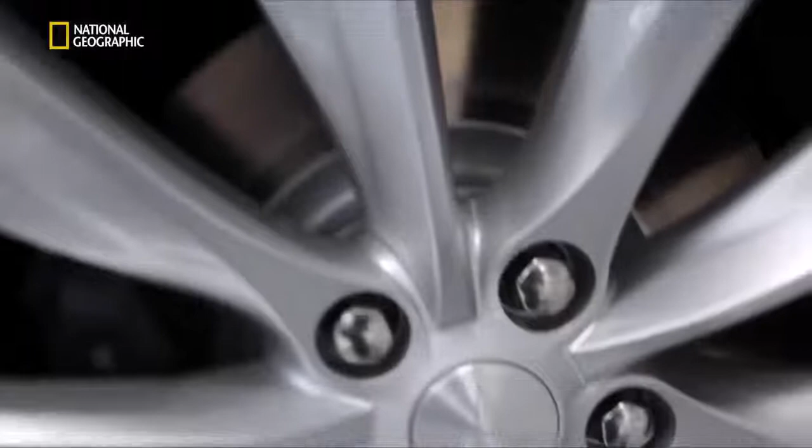Aluminium bodywork, 19-inch alloys, and a $50,000 price tag. At first glance, this car is the latest in a long line of high-end sedans. But that is where the similarities end. The Model S is a totally different type of car. Tesla believe it can lead a revolution and change the face of motoring forever.

It's the first ever mass-made premium sedan powered purely by electricity. Designed to have speed and range, and not a drop of gas. Our goal is to create an electric car that is the best car in the world and show that that's what an electric car can be. Tesla's goal is to kill off the combustion engine and prove the electric car has finally come of age. Driving a gasoline car is going to feel like yesterday. Driving this car is driving the future.

This is Elon Musk, Tesla's co-founder and CEO. Elon is an inventor and a maverick entrepreneur, one of America's youngest billionaires. I like exploring, I like technology, I like creating things that have never been seen before or even imagined before. He is a genuine Silicon Valley success story. In the mid-1990s, Elon set up a small internet company. By 2002, he'd sold PayPal for $1.5 billion. Next, he founded private rocket company SpaceX. It's all part of Elon's life mission.

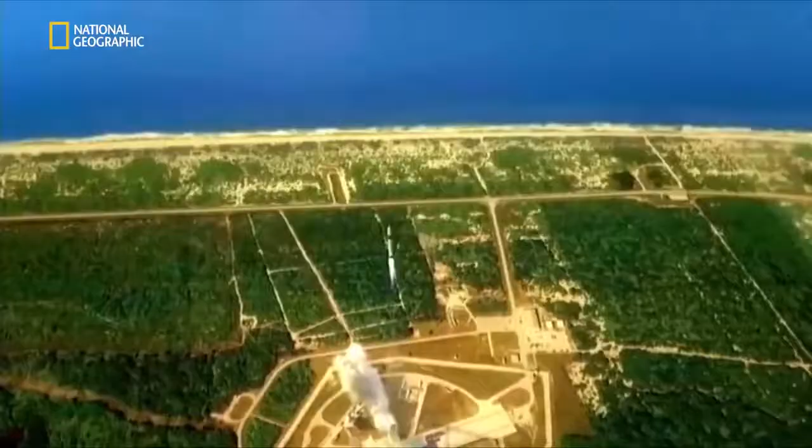When I was in college, I tried to think about, well, what are the areas that would most affect the future of humanity? So the three things were the internet, making life multiplanetary, and the third being sustainable energy. So that's what really ties together my companies, is that sort of thought from 20 years ago. Tesla Motors is Elon's sustainable energy brainchild. Named after electric power pioneer Nikola Tesla, it's a car company that only makes totally electric vehicles. No hybrid and no alternative fuels. Absolutely no tailpipe. The company estimates their electric cars cause 50% less CO2, even if much of the electricity comes from a coal-powered plant.

It's technology Elon and co-founder J.B. Straubel believe we need. We're solving problems for our children, our grandchildren. Oil is a finite resource, and eventually we have to find alternatives. When you take that oil out of the ground and you burn it, it's extremely dangerous. We should not play Russian roulette with the atmosphere. We only got one. Tesla's founders have a vision of a world without gasoline cars. They are convinced electric is not only cleaner, but better. Now, they want to prove it to the world.

They believe their cars can trigger a transport revolution and bring electric motoring to the masses. What we're doing here at Tesla can have an amazing impact and revolutionize the auto industry and make every car on the road electric. That's our end goal. The Model S is to lead their revolution. It's to be an electric car unlike any other. A family sedan that can go from 0 to 60 in under 6 seconds, and further on a single charge than any other electric production car. Designed to match the top gasoline competitors. With the Model S, we're taking things to the next level. It's a full-size sedan, so it's competing in the premium segment, along with, say, a BMW or an Aston Martin.

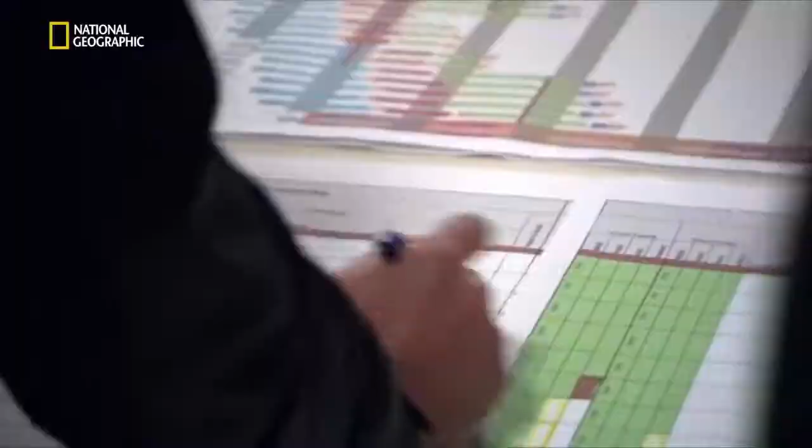But the car is only the beginning. Such a revolutionary vehicle demands a revolutionary factory. Tesla needs to create an unprecedented state-of-the-art facility from scratch. Elon brings in Gilbert Passin as head of manufacturing. Gilbert is an expert from one of Toyota's award-winning plants in Canada. His description of my job to me was very simple. You've got to create the best factory in the world with the best people in the world and make the best premium car sedan. And I said, okay, so where's the factory? Well, you have to find one. Where's the team? Well, you have to make one.

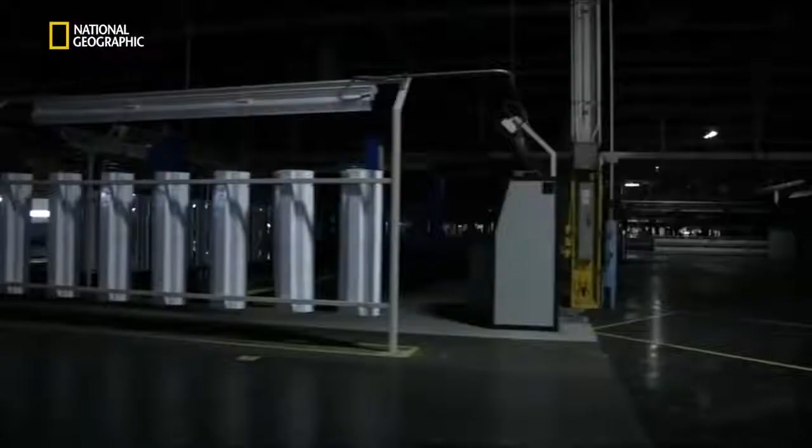The company purchased a former GM and Toyota site in Fremont, California, on the edge of Silicon Valley. The abandoned facility is a traditional car factory. Dark, little natural light, bare concrete floors. When Tesla Motors move in, it's the birth of a megafactory like no other. It's a totally fresh approach to car manufacture.

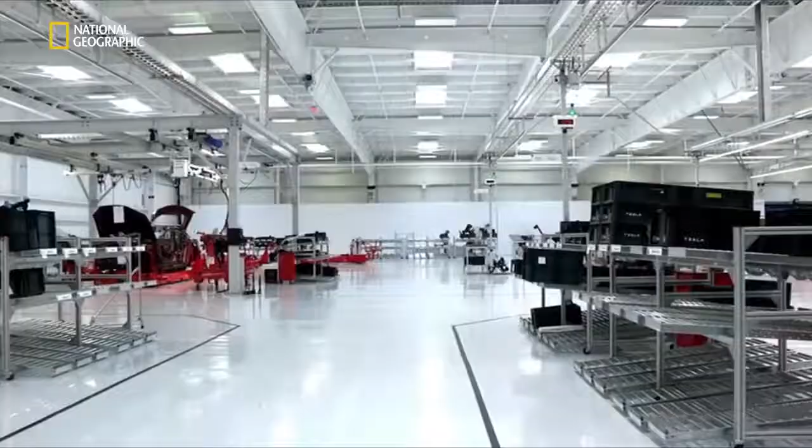The walls and floors are painted white. The machinery a striking red. Skylights and windows flood the factory with sunlight. If you make the factory pristine and clean, that sets the tone for the vehicle. We want that same sense of quality and precision in the car itself.

As part of the whole company ethos, bikes are provided so the workers can get around the factory. I think it's important to have an environment where people look forward to coming to work. So it's worth putting some effort into making the factory beautiful.

In true Silicon Valley style, they fill the space with the most advanced technology, creating an automated production line capable of building tens of thousands of cars. Super efficient multitasking robots, self-guided smart carts, and computerized production schedulers.

The factory is designed to be up there with the very best in the world. We love engineering. We love beautiful machines. We love new technology. We love to innovate with high technology. And also in manufacturing, we love to do that.

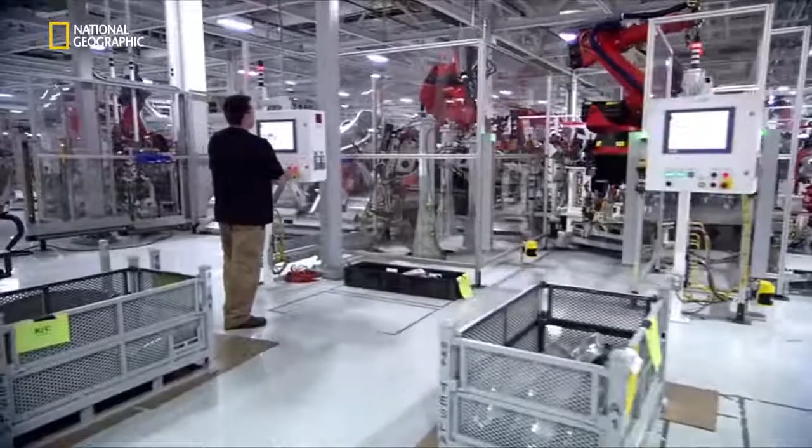Without training, these sophisticated robots are useless. They all need to be taught before they can run tasks automatically. Every robot is programmed by hand. The Tesla team has meticulously trained 130 sophisticated robots over a year and a half.

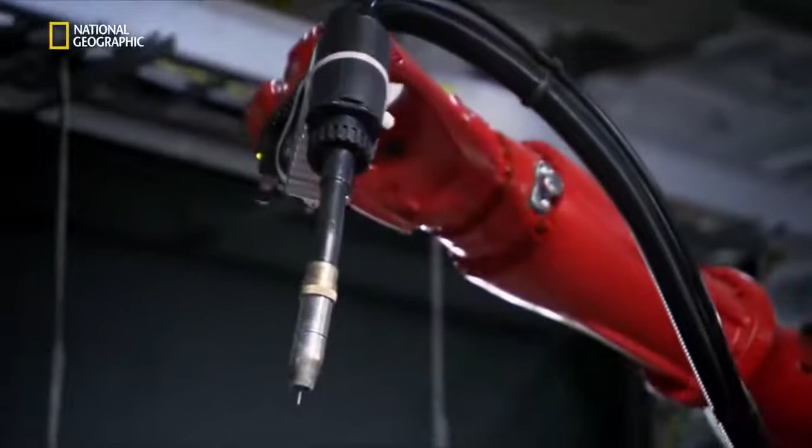One of the last robots still to be programmed is a multi-point welding robot. It will be used to join the car's underbody. These are pretty busy robots, so we gotta make sure that our takt time is good. A robot's work is only as good as the man who trains it. Brad Johnson is a welder with over 25 years' experience at the highest level.

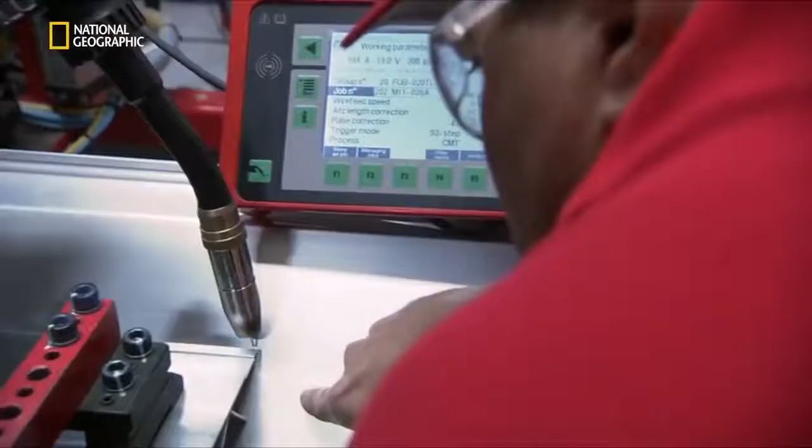Getting this done today, we'll have the teachings all nice and smooth, and then we can start running 100% in full automatic. That sounds good. The space in which the robot operates is treated as a three-dimensional grid. The head can be manually guided to any point using a teach pendant.

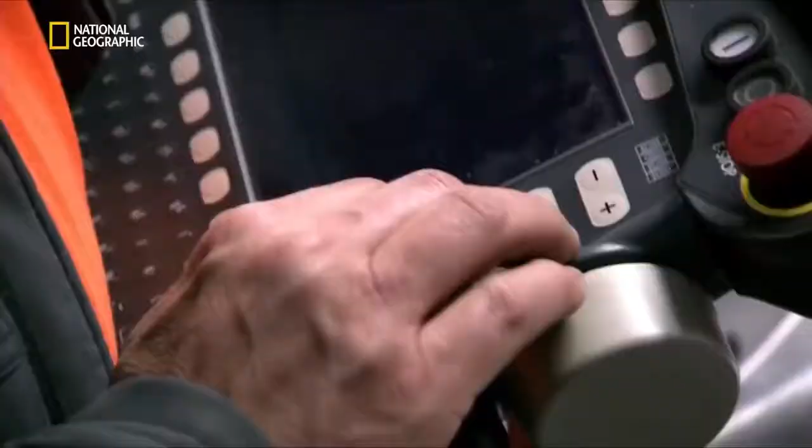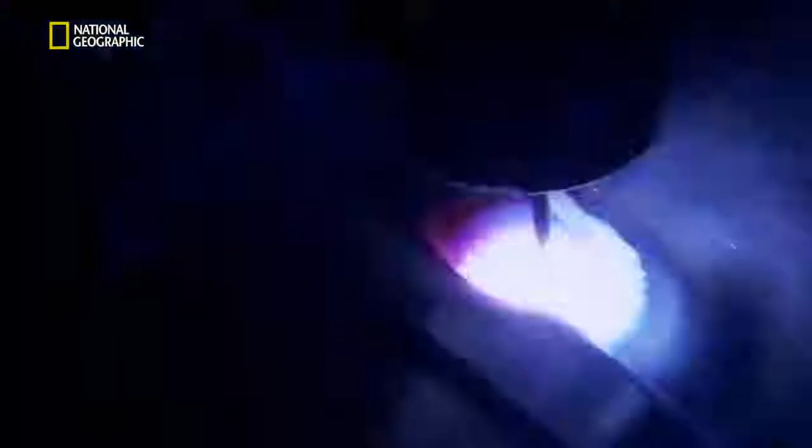There's our start point and our weld position. Brad guides the robot millimeter by millimeter and uploads the coordinates. The robot works out the most efficient route and runs the program.

Looks like the teaching is right on mark, and we have a really good quality weld right here. So we should be able to run full auto with this weld. When full production begins, Brad's handiwork will be exactly replicated by the robot 100 times a day.

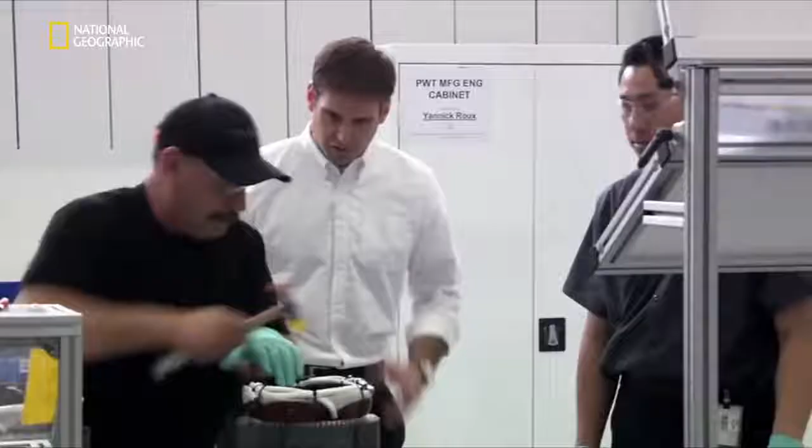Since their inception in 2003, Tesla Motors have been pursuing their electric car revolution with a step-by-step strategy. In an unconventional business move, Elon decreed that Tesla must invest in their reputation first and worry about profit later. Stage 1. Make a small number of high-value cars that prove electric power can be desirable. The Tesla master plan is very simple. We start off creating an expensive, low-volume car to help break the mold in electric vehicles.

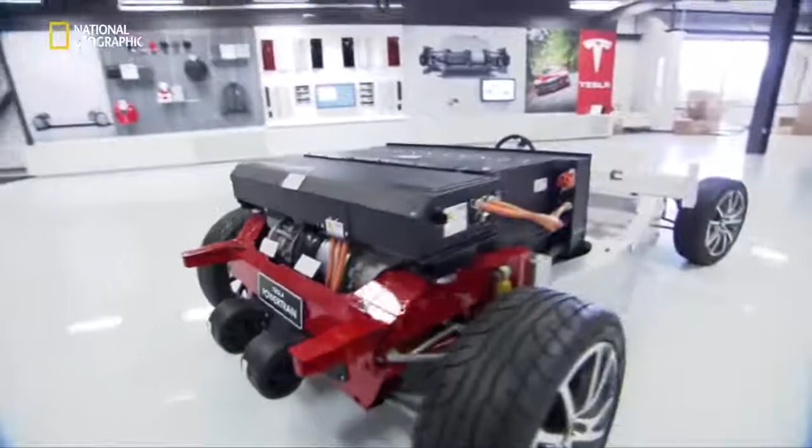Plan in place, they set to work on their first car, basing it around the British-built Lotus Elise. 5 years later, they released the Tesla Roadster. Quicker off the blocks than an Aston Martin Vantage, the electric sports car astonishes the motoring world. Step 1 complete in the Tesla strategy.

What we showed was that an electric car could be sexy, it could be fast, and it could be long range. And that if you produce such a car, that people would buy it. But as a $100,000 two-seat sports car, it's a luxury second vehicle to most of its owners.

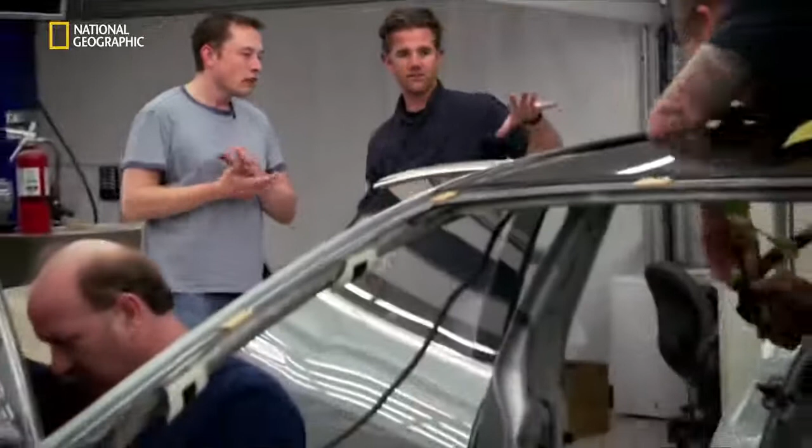Time for the pivotal Stage 2 in the master plan. A car that costs half as much and sells in much bigger numbers. A very important step in the Tesla strategy is really going to show that a mainstream electric car can be better than a gasoline car. The Model S is the second step in Elon Musk's vision of an electric revolution. A premium mass-market sedan designed and built from the ground up by Tesla.

At the studio in Los Angeles, they are working to craft that car. The Model S is really the foundation of Tesla. It's the first true product designed, engineered, built, manufactured by Tesla. And it's really the beginning of what our mission is about.

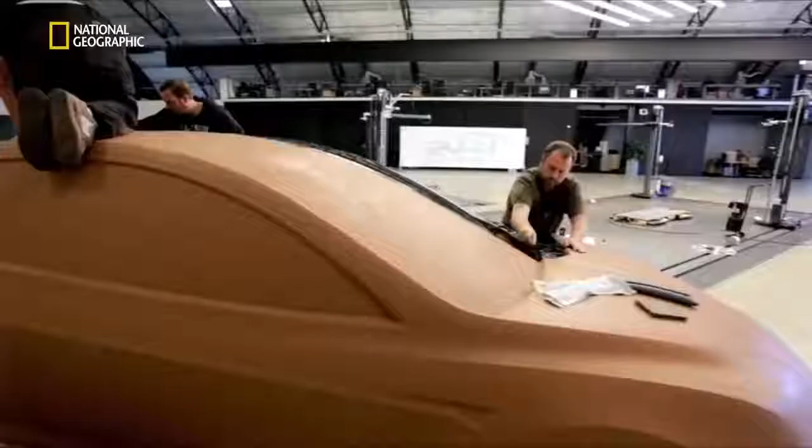Franz von Holzhausen is the chief designer. He believes Tesla's design needs to have some conventional appeal. It's really easy to have a clean slate and go pretty crazy with that. We had to start with something that people could relate to. If they even knew or cared that it was an electric vehicle, they were attracted to it.

We've stretched the sedan and made it a little bit more modern, but it's still a sedan. It still has this somewhat traditional cue, and so it's easy to love because of that association.

Although uniform in appearance, the Model S is a unique car. It was conceived as electric. Even the shape is designed to maximize the battery's range. The body and the waist here is all slim, so there's no excess fat or body mass on this car. And that's another one of those elements that just translates into great efficiency.

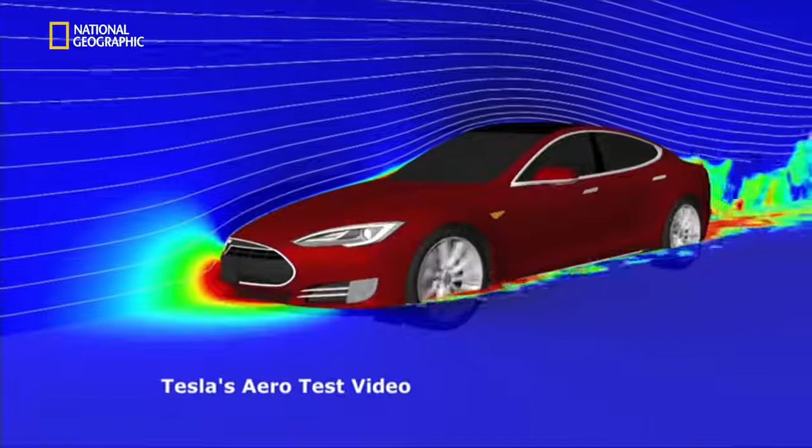This car is one of the most aerodynamic sedans on the market. In an electric car, conserving the battery power is so important, the designers put huge efforts into reducing the drag. Even the door handles are aerodynamic, receding flush into the body.

But it's the interior that is most heavily influenced by the electric powertrain. The powertrain is incredibly small. You get the same performance out of a motor that's the size of a watermelon that fits between the rear wheels, and everything else above that is what I call the opportunity space.

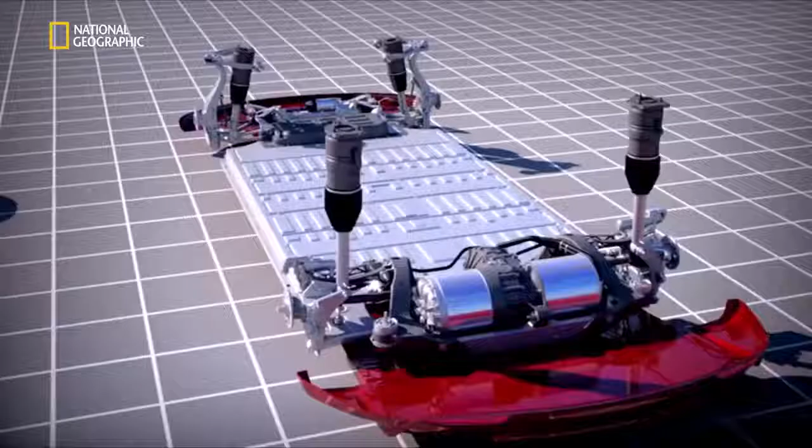The design team started with the motor and flat battery pack and worked upwards. With the motor next to the wheels, there's no need for a drive shaft, so there is no rise under the rear middle seat. There is no fuel tank or transmission. The Model S has free space from the floor upwards.

What you'll see is a vast amount of space. In fact, it's actually so big that we decided that we could actually fit 7 people, and we do that by putting 2 rear-facing child seats in the back here. And you can see where they fit here, and their legs go right down in there.

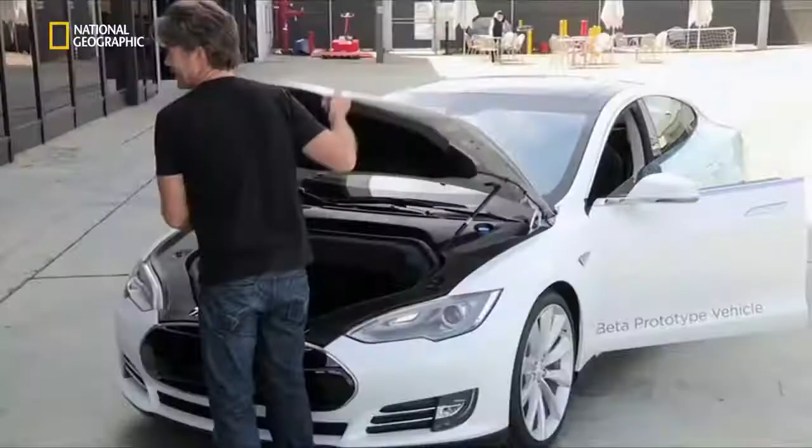So this is what we call the frunk, and it's really the trunk in the front of the car. And arguably, you can put a whole bunch of stuff in here, even when the back of the car is totally loaded up with people and kids and stuff. And who doesn't need one of these?

Tesla promote these unique features at every opportunity. As a new marque, they're trying to make an impact in a marketplace crowded with established big hitters. Just looking at the United States, of the 3 other car companies, the youngest is 90 years old. So clearly this is not an industry that has been supportive of newcomers.

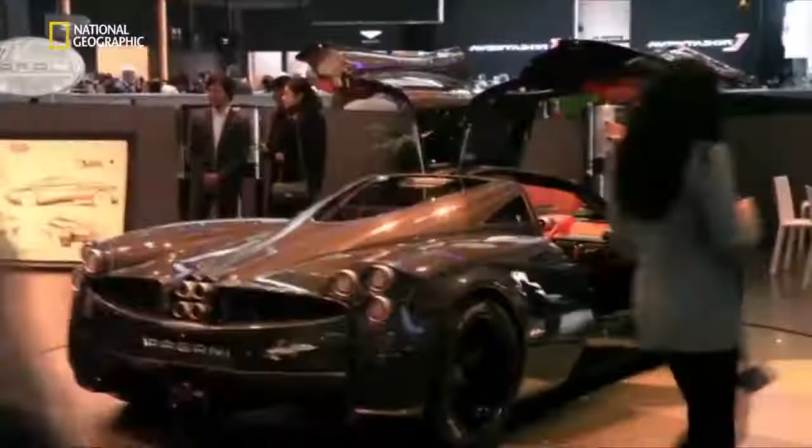The Geneva Motor Show 2012. Another leg in the company's relentless promotional campaign. We're done selling Roadsters in North America, so this is our product. It's our product, Tesla product, and therefore we need to get it out to start selling.

Industry experts are judging Tesla on the Model S. It's seen as make or break. Maybe Tesla has a bright future. I think the Model S is very decisive to see if there will be a great future or if there won't be a future at all.

The company have taken the risk of collecting prepaid orders on the car. They've amassed nearly 10,000 advance sales. The financial boost also creates real pressure. I get harassed quite a bit actually by some people who have reservations, and it's a lot of expectations, very high expectations that we're going to have to meet and exceed, really.

Some prepaid customers have been waiting up to 3 years for their car. In return, they've been promised a delivery deadline. I do feel an incredibly strong obligation to those that have placed their faith in Tesla and put down deposits. I'll do anything to make sure that their faith is not misplaced.

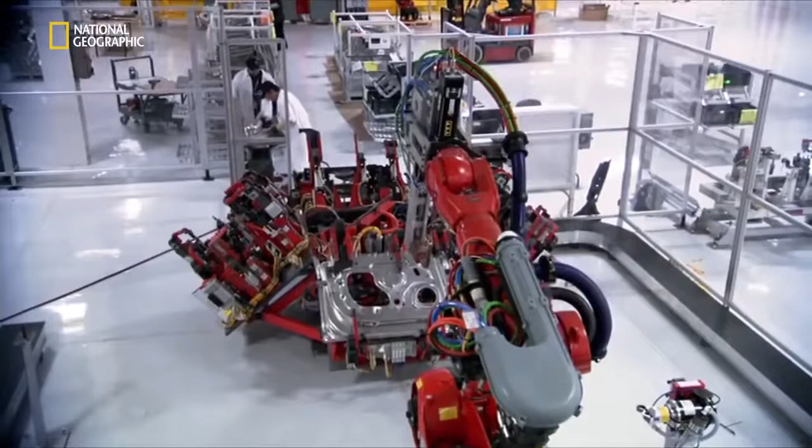The delivery deadline for the first cars is now only 2 months away. But the brand new factory hasn't built a production car yet. If the customers are to get their Model S on time, the facility urgently needs to start manufacturing. The speed at which we have to work here is extremely important to the company's bottom line. This is a kind of timing that is really, really challenging on many, many different accounts.

Tesla need to build 20,000 cars a year. But before mass production can begin, Gilbert and his team must prove the factory is ready. The company is relying on them to get it right. We have to make sure that car after car, the quality is there, everything is perfect along the way. So we are really gearing up towards a production ramp-up.

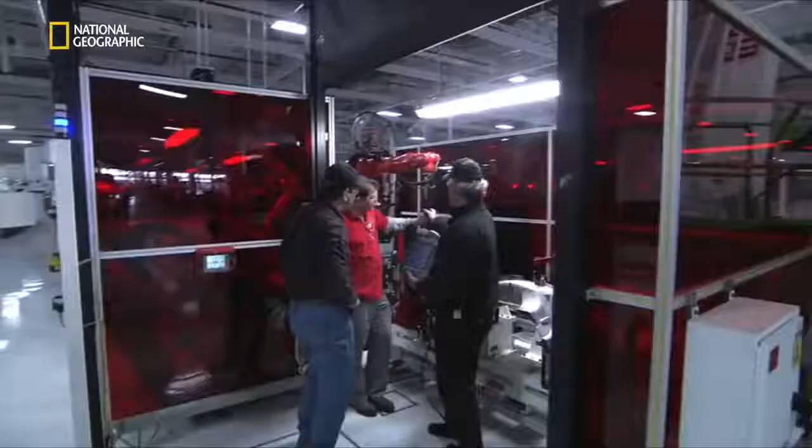Over the next few weeks, the factory will test manufacture a limited number of Model S. If the line doesn't perform with these cars, the company will be forced to miss their deadline. Tesla's electric revolution would be over before it started. A very, very important moment is the birth of Model S in our Tesla factory. And it's where the rubber is going to meet the road, so to speak.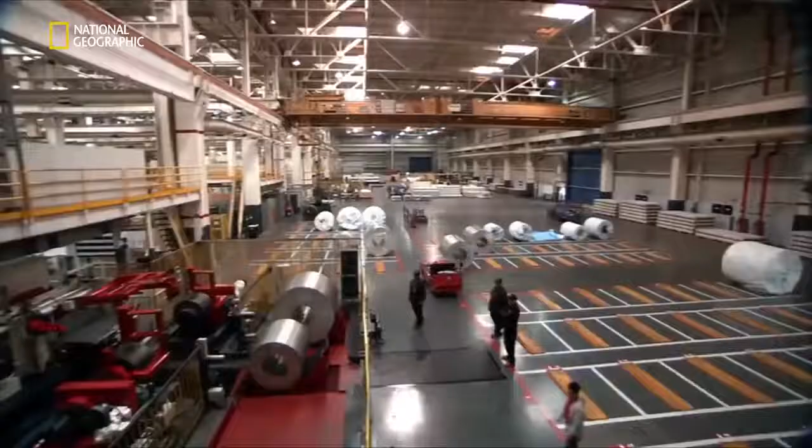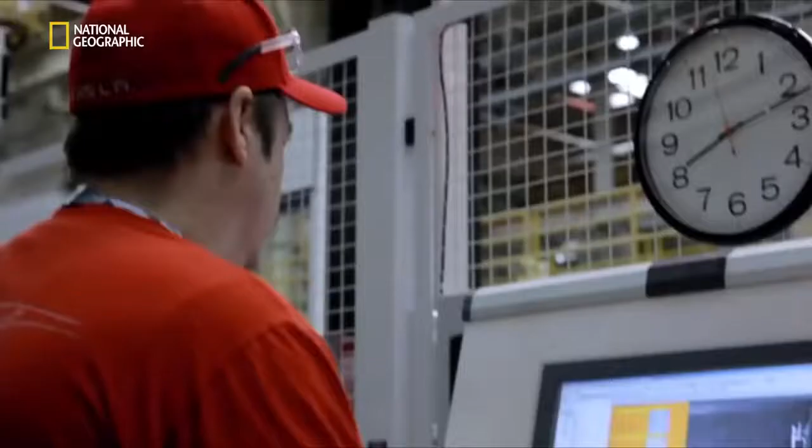The process begins in stamping. To increase the battery's range, the company have decided to build 97% of the Model S with lightweight aluminium. It's an extremely rare feature in a mass production car due to the cost. Every Model S starts as one of these. The roll is loaded into the mechanical cutting machine.

Once cut, the panels are passed to the stamping press. We need to translate flat pieces of aluminum into 3D forms. And how to do this with aluminum stamping with the level of quality that we expect is really, really challenging.

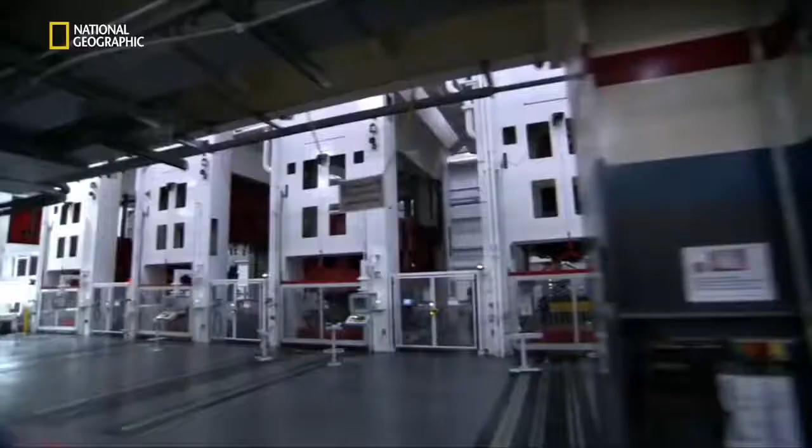To meet the challenge, they buy the largest available stamping press in North America. It's one of the first pieces of equipment they install. Over 3 stories high, it has to be transported from Detroit on 70 trucks and then entirely rebuilt.

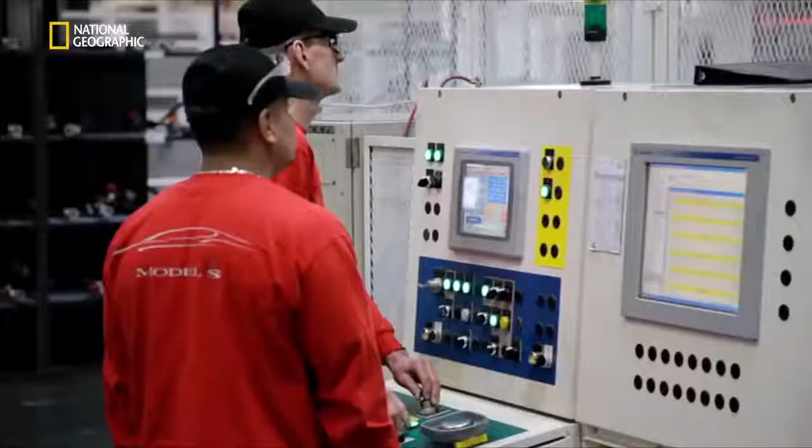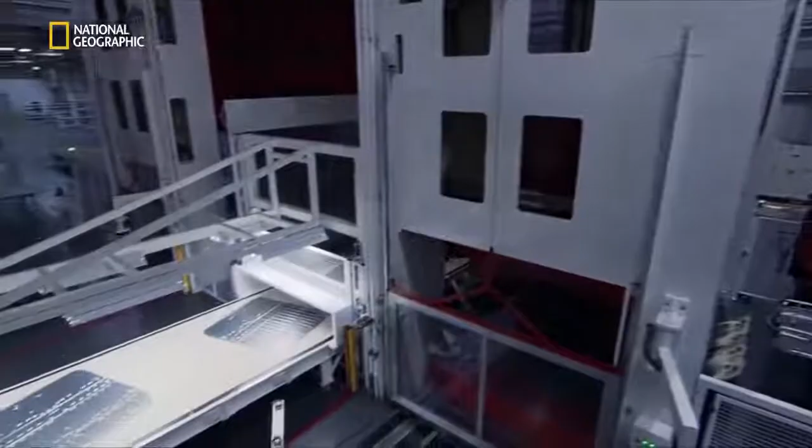The immense pressure from the stamp allows them to press the complex body shapes needed for the Model S. It can be mounted with different heads, known as dies, that mold the panels into a wide variety of shapes. Robotic arms feed the 4 stamps. Each stage forces a more detailed 3D shape, producing stacks of floor plates.

These lightweight aluminium parts improve the Model S's power-to-weight ratio, which helps increase the performance and range. The 2 things that obsess co-founder and technical chief, J.B. Straubel. Any ideas on how we could make it better? Performance and range were the 2 big issues that needed to be improved, and that's where we've put most of our focus on the technology and powertrain.

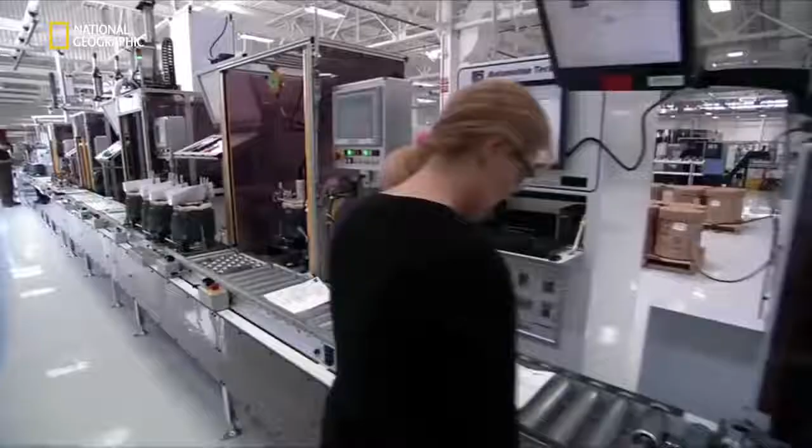Powertrain manufacture, 2nd floor. This is where they build the heart of the Model S, the motors and battery packs. Tesla know the electric powertrain will define their cars, so they push to advance the technology themselves. This is an extremely exciting field where inventions continue to happen even faster than they did in the years previous.

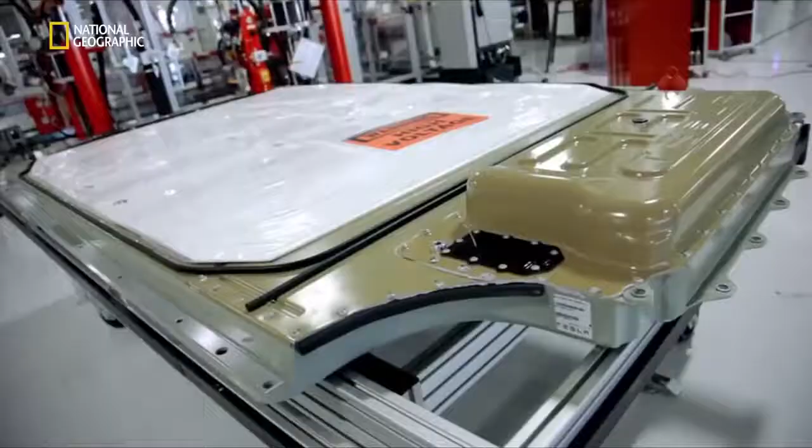Tesla's solution to improving battery life appears startlingly simple. They use thousands of small lithium-ion cells, similar to laptop batteries. Thanks to these regular batteries, the company say the Model S has achieved a top range of 480 kilometers. Once you have 250 to 300 miles of range, then you're in a different usage mode. You're in a range that is equivalent to most gasoline cars.

The car can be charged by 100 kilometers every hour from a regular power outlet. Ultimately, Tesla are hoping to install superchargers along major highways that can charge the car to capacity in 45 minutes. You can charge the car up every night, but you don't need to. You can actually charge it once a week.

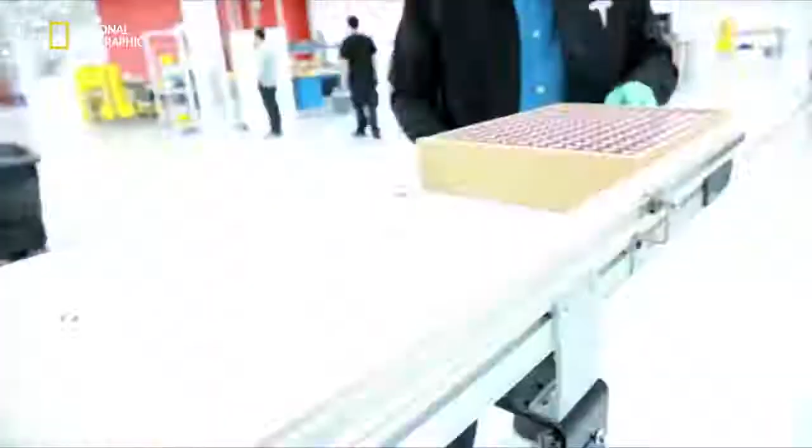The high-performance battery pack is formed with over 7,000 small cells. They're organized into a flat layer with specific groupings of positive and negative. The final layout is the key to the pack's power and range, and Tesla considers it absolutely top secret.

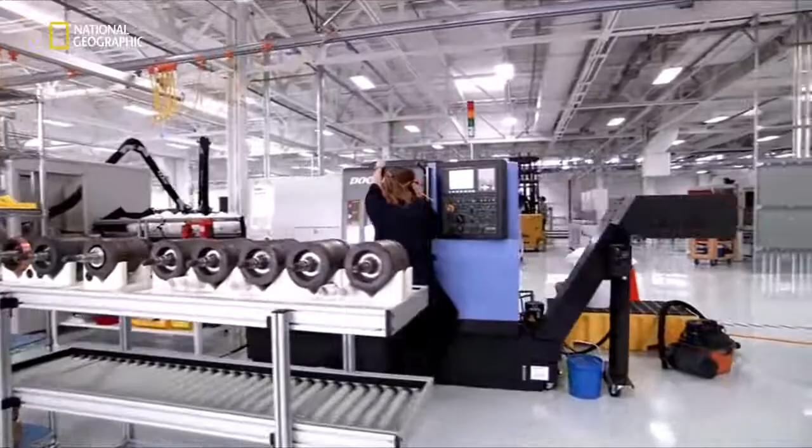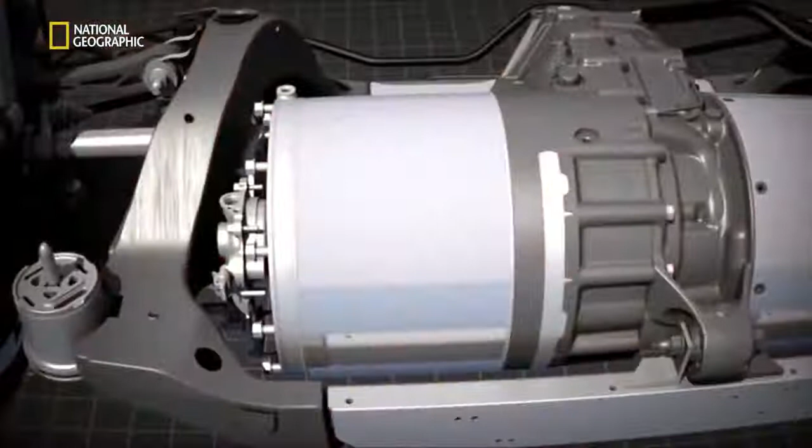The motor unit is also developed in-house. It's essentially an AC induction motor, a concept invented by 19th century scientist and Tesla Motors namesake, Nikola Tesla. He harnessed an electromagnetic field to turn a basic motor. Modern-day Tesla has developed their motor with a highly conductive copper cylinder. When the electromagnetic casing is fed with current, the copper cylinder inside starts to spin.

It's nearly 3 times more efficient than a combustion engine. In fact, there are only 3 moving parts. It connects directly to the rear wheels and doesn't need a transmission. These are the 3 moving parts in the whole Model S powertrain.

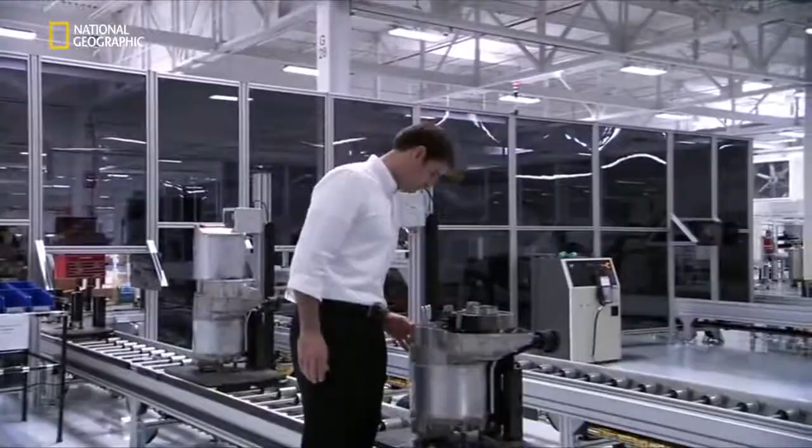One of the cool things also with this very simple gearbox is that when we want to go in reverse in the car and back up, all we have to do is spin the motor in the other direction, and the car backs up. We don't need a clutch, we don't need a separate gear for reverse. The entire drive unit is under 1 meter long, smaller than a golf bag. But it propels the Model S, a family-size sedan, into the class of performance cars.

In fact, this powertrain creates a totally different driving experience. Program Director Jerome Guillen works constantly to refine it. As with the light switch, electric power can be fully applied instantly. The first thing that's gonna surprise people is how much torque you get so quickly. That instant response, you cannot really mess with the throttle too much, because if you push on it, then the car will go.

Even from a stop, you have a very quick takeoff because basically the torque is instant. So if I stop here and then I start, you will see that we have an acceleration right from the beginning. Any speed, you have that same torque available. So it's very easy to pass a car or to get out of harm's way if needed. Unlike gasoline cars, which have to change gears, the Model S can accelerate to top speed totally uninterrupted.

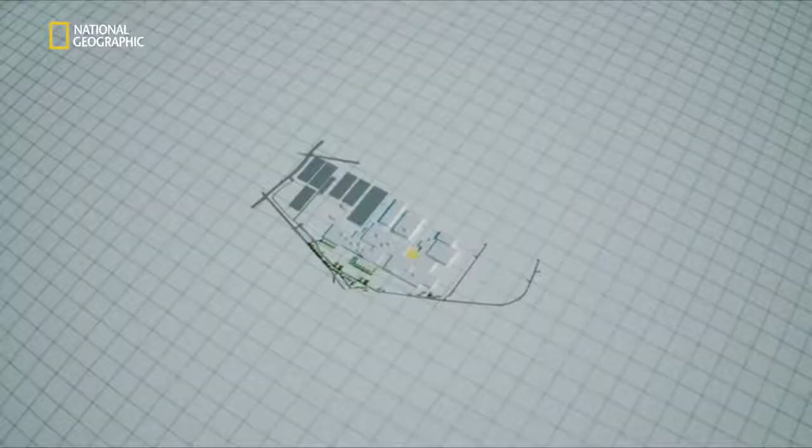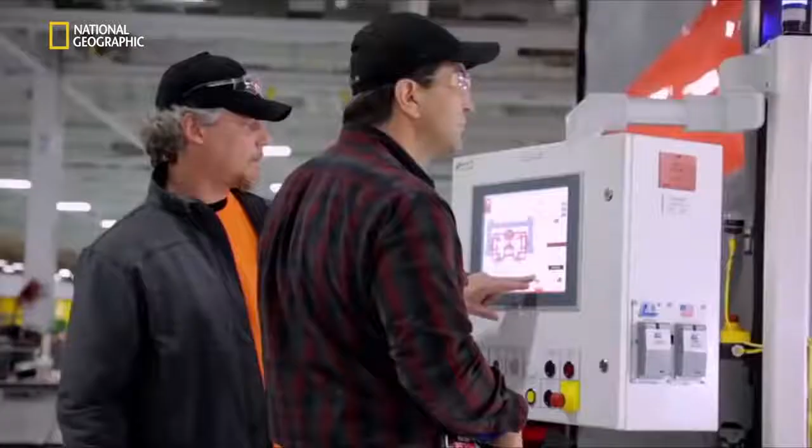In the factory, the delivery deadline is now fast approaching. The Model S test production cycle reaches the main assembly area. The car is based around an aluminum underbody. To make it, engineers weld struts and casts into a framework. Brad's newly trained welding robot is about to be tested in full automation. They have trained the robots with prototype parts. Now, with final components coming through successfully from stamping, it's automated production for real.

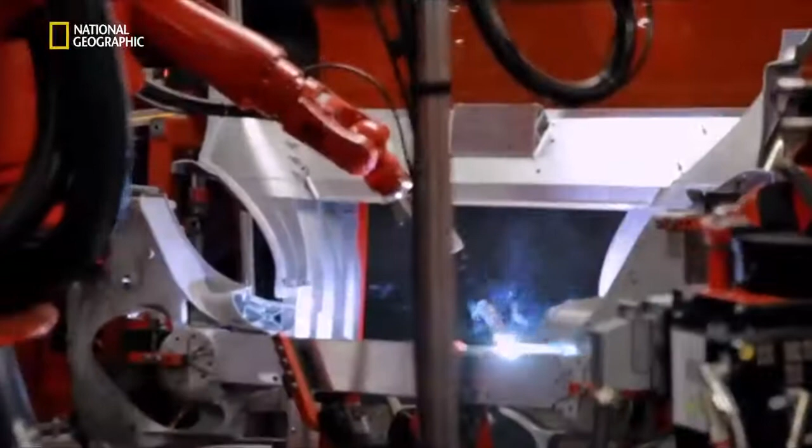Under observation, it's a tense time for the team. The robots work in a tightly coordinated chain. The second phase hits an issue. It shuts the whole process down.

With the deadline looming, Elon Musk is determined to keep Tesla's waiting customers happy. He's organized a Model S test drive event for the people who've placed deposits. The test rides will go out onto Jack Northrop Boulevard, so you'll get a chance to see that this isn't some show car that doesn't actually do what it says. It will go fast and with a lot of people in it. And quiet. Quietly, yeah.

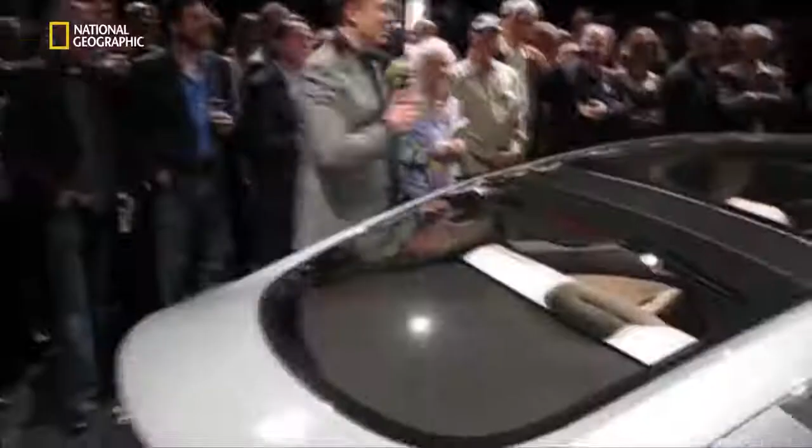Many have prepaid years ago, and it's their first time inside a drivable Model S. Customer and board member Steve Jurvetson captures his experience on his mobile phone. Wow, this is insanely cool. It's a surreal scene. It's way cooler than I can imagine. You really definitely saw it. Yeah, it's nice. The first ride has to be documented here. The event seems a success. Now the company need to make sure the customers get their Model S's as promised.

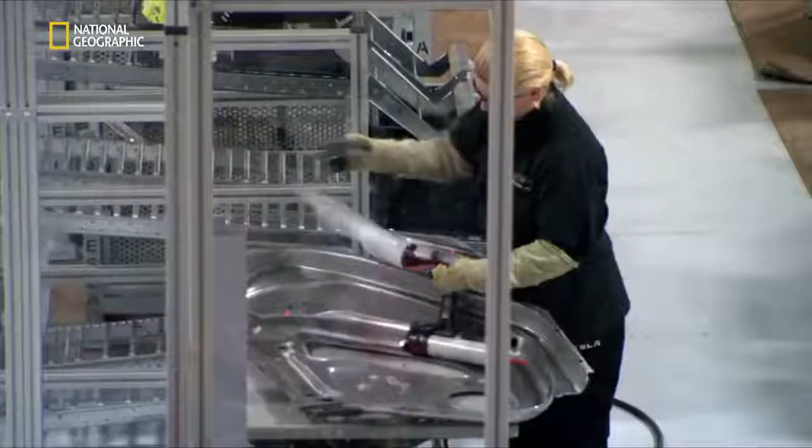With only weeks to go, welding has hit a glitch in automation. One of the robotic clamps is millimeters out of line. It's a tiny difference, but enough to disrupt the process. With the way the robots work and how we have such a tight tolerance of 1 millimeter to stay on, sometimes the new parts won't reach a prox or the clamp won't close all the way. A major delay will disrupt the whole production schedule and threaten the deadline.

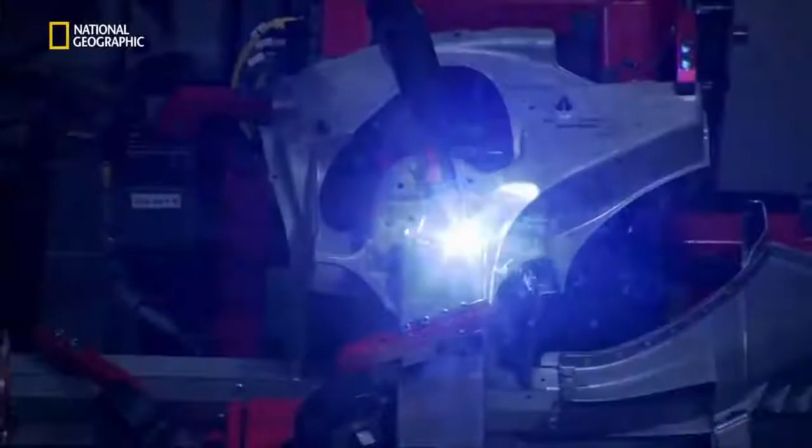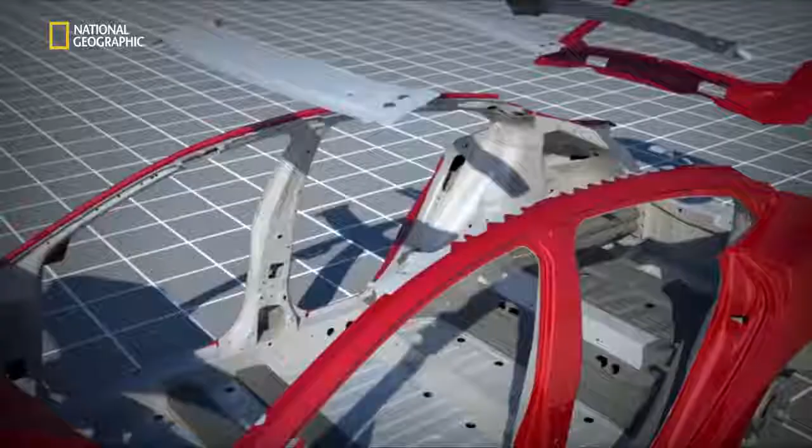They adjust the settings and set the robots in motion again. This time, it goes off without a hitch. To the team's relief, the process can be approved for mass production. The run through the automated line reaches the Model S exterior. The Model S body is made up of 14 different sections. To speed the workflow, Tesla construct each section at separate sub-assemblies.

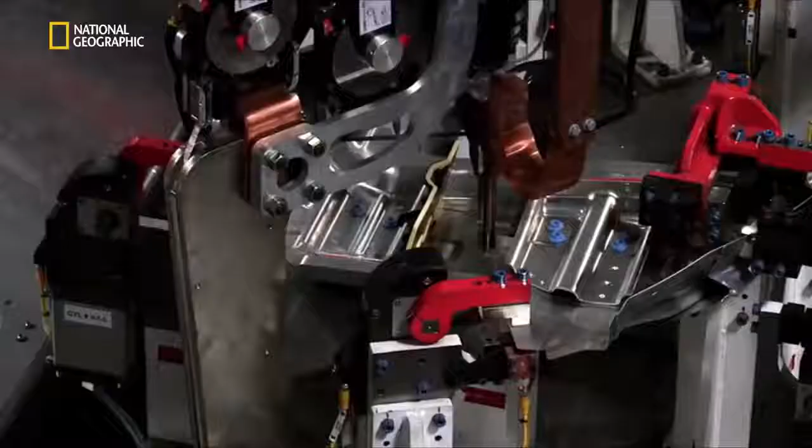Door sub-assembly. The internal frame is joined to the exterior panel. As the robot's pincers come together, they fire a rivet and join the aluminium sheets. Over to the right, side body sub-assembly. One of the most advanced aspects of Tesla's robots is that each arm can perform a variety of different tasks. We have to use all the gamut of technology to make the aluminum joint between stamping and welding and riveting and bonding and all these things using robots that are multitasking.

This flexibility is essential for a compact and efficient workflow. A robot can spot weld using a pincer tool and then automatically detach the pincer and pick up a clamp tool. The same arm that joined the panels can now move it to the next station. It's clever, but tricky and needs constant refining. When you draw something yourself, you take a pencil, you take an eraser with the same hand, right? And then you change the tool, so to speak. Same thing here. Once assembled, the sections are brought together at body assembly. Here, they're riveted around the welded underbody to form the basic shell of the car.

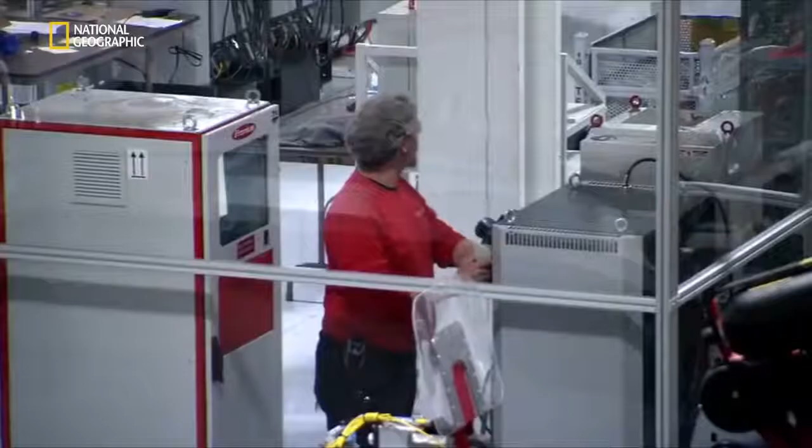All the sections are lined up alongside the central framing line. Gradually, the automated line builds up the side sections, ready to house the doors. A test batch of 3 cars is complete. Body assembly has demonstrated it can run successfully in full automation. It's a vital milestone in the countdown to mass production.

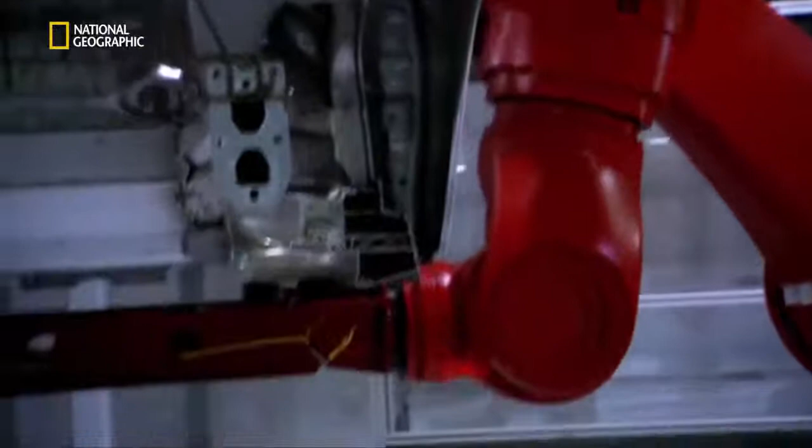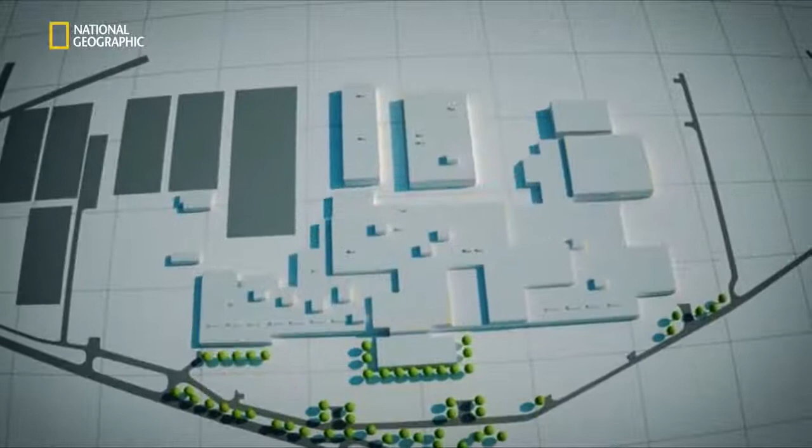Completely assembled, the aluminium body is now known as body in white. It's ready for some colour. The body in white is loaded onto an overhead train that carries it to the paint area. At this vast facility, the paint centre is in a totally separate building. The Fremont site covers nearly 95 football fields of space. It's so big, the Model S production line only fills 20% of it.

For Gilbert Passin, the extra space is the cornerstone of Tesla's grand strategy for an electric revolution. The Tesla factory is huge. It's about 5 million square feet on 2 levels. Right now, we are only utilizing a small fraction of the space, but most of it, as you can see behind me, is what we call the dark side. It's sort of dark and not utilized yet, even though we have a lot of plans for the future on how to fully utilize this entire building.

These expanses are an integral part of the company's stage-by-stage building plan. They want to fill the space with a production line for a further range of Tesla vehicles. A very high-volume, economy-priced model, the Stage 3 car. In the future, we intend to expand our range of vehicles, maybe of a smaller size and also more affordable for the market. And this factory is ideal, and we are going to make this a super mega factory.

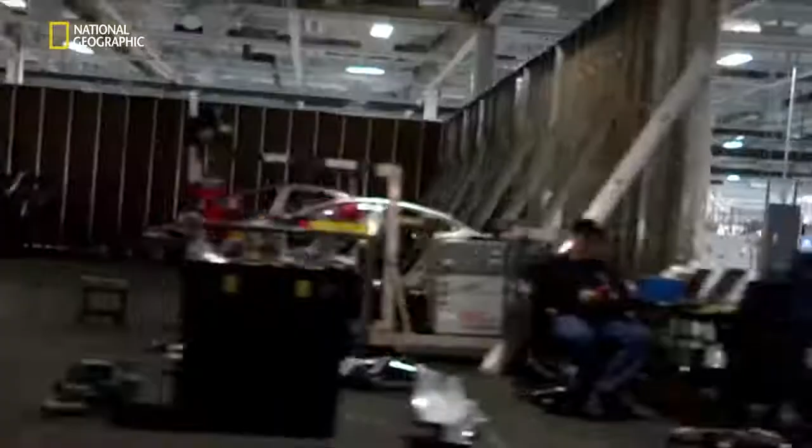Long term, Fremont is meant to produce the low-cost Stage 3 electric car in the millions. It's the final step in Elon Musk's Tesla master plan. To really have widespread adoption of electric cars, we have our 3rd generation vehicle, which would be a low-price, high-volume vehicle, and that's really what's going to fill out the rest of this humongous factory. I'd love to bring this to 500,000 vehicles a year as soon as we can. The future of Elon's strategy first depends on the success of the Model S.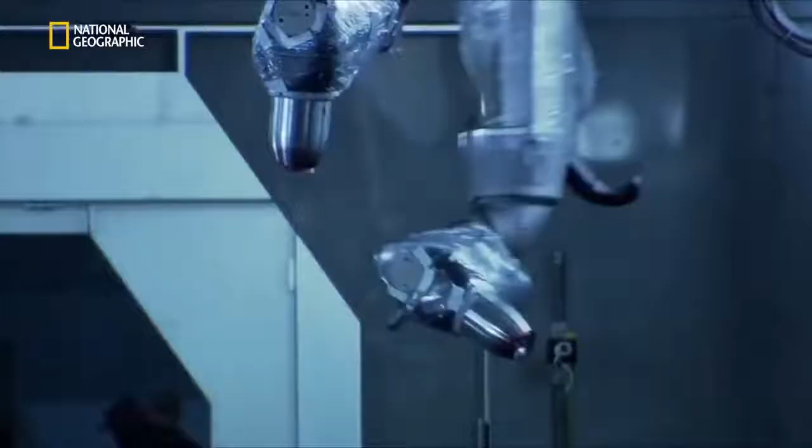In production, the time to the delivery deadline is now running low. The aluminium body arrives on the overhead train from Body Center. Paint Center. This is where they make the car look like a premium sedan. It's a state-of-the-art process. There's a lot of technology that goes into the Tesla car, but the very first thing they'll tell you is what color of Tesla car they bought. That's how important the paint is.

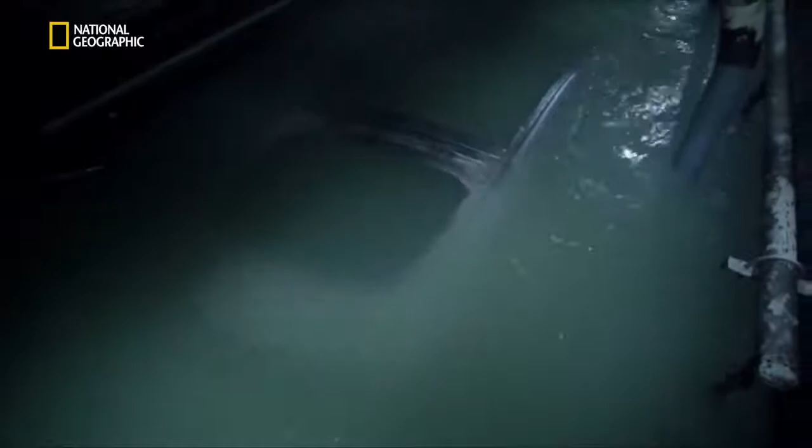First, a roller coaster ride of treatment baths. Detergent to clean the surface, and then electrocoating. The electrocoat helps attract the paint to the aluminium. The primed car is ready for colour. This vehicle will be sprayed with their trademark tint, what Tesla calls signature red. It's a color that we developed that's different than anybody else's red. It's been developed with glass flake to get the specific type of sparkle that...

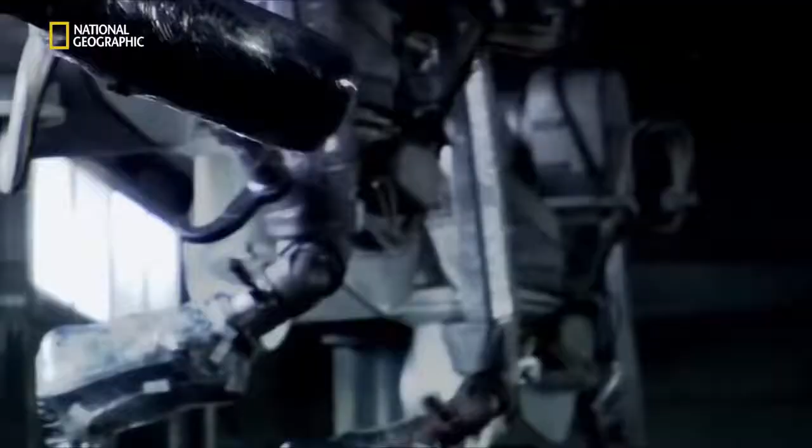This man has a vision to create the best electric cars ever seen and consign gasoline to history. This is something truly revolutionary. He wants to build his unprecedented Tesla car in a futuristic new factory and trigger an electric transport revolution. It's been a long time since something like that happened in the car business, but it's here. It's a dream many have had, but none have realized.

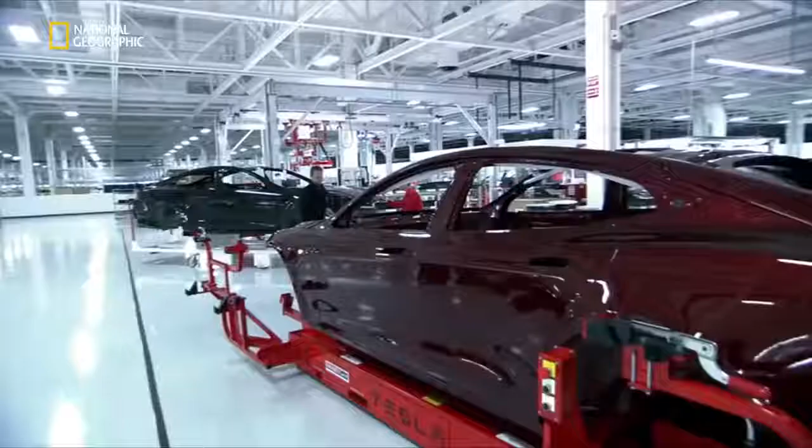Aluminium bodywork, 19-inch alloys, and a $50,000 price tag. At first glance, this car is the latest in a long line of high-end sedans. But that is where the similarities end. The Model S is a totally different type of car. Tesla believe it can lead a revolution and change the face of motoring forever.

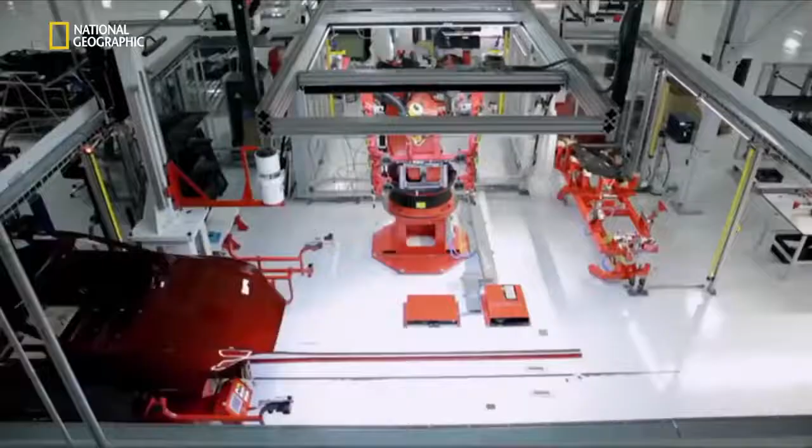It's the first ever mass-made premium sedan powered purely by electricity. Designed to have speed and range, and not a drop of gas. Our goal is to create an electric car that is the best car in the world and show that that's what an electric car can be. Tesla's goal is to kill off the combustion engine and prove the electric car has finally come of age. Driving a gasoline car is going to feel like yesterday. Driving this car is driving the future.

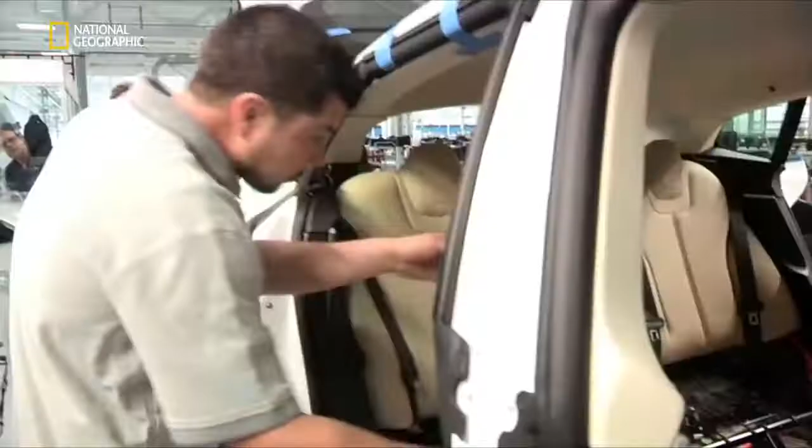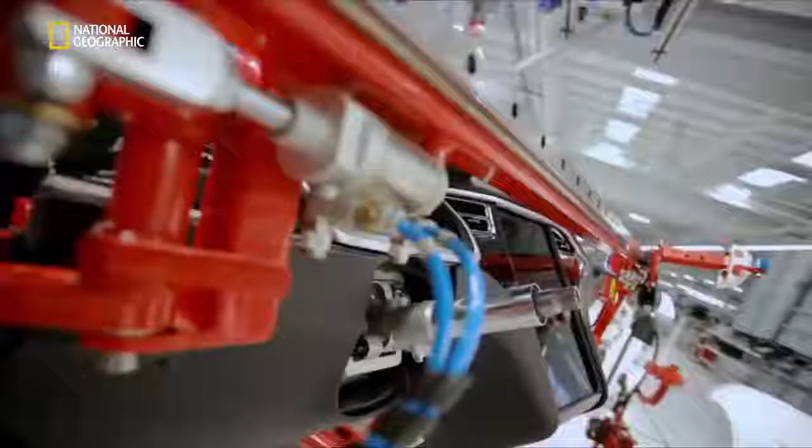This is Elon Musk, Tesla's co-founder and CEO. Elon is an inventor and a maverick entrepreneur, one of America's youngest billionaires. I like exploring, I like technology, I like creating things that have never been seen before or even imagined before. Proof the car is a product of the tech-savvy US West Coast.

The Model S carries a touchscreen tablet inspired by Tesla's Silicon Valley neighbors. Tesla is very much a Silicon Valley company that has a Silicon Valley operating system, which is similar to a Google or a Facebook or an Apple, joined together with a tremendous amount of great automotive expertise. It's about bringing the things that we're used to, our phones, our computers, and the interaction that we have with them into the car.

The car has a mobile 3G internet connection. The driver can download software upgrades and customize the display. The car's always connected to the internet, so we can understand your daybook, and we can know that you're going to work at 8 a.m. on Monday, and the car can be warmed up for that experience.

The entire command center is housed on the 17-inch tablet. The interior is virtually buttonless. It does some really amazing things. Not only does it make the rest of the interior super clean and really uncluttered, it allows you to have just amazing control of the car, and it's just, you know, a push of a button. Like magic.

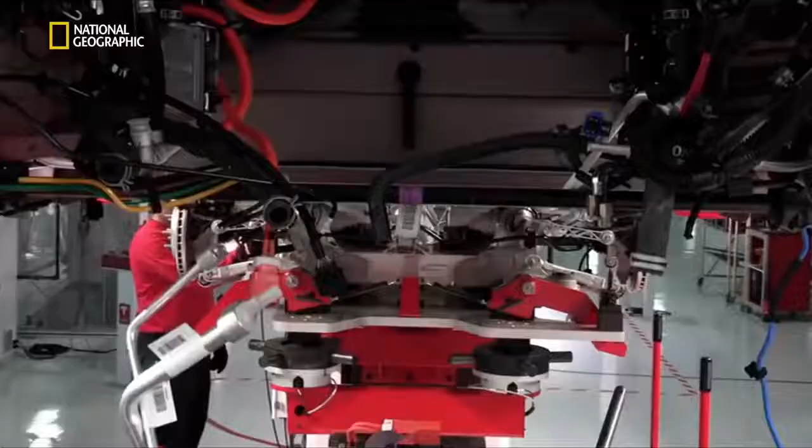At the factory, the start date for mass production is now only 2 weeks away. The first batch of test vehicles reaches the vital final stages: powertrain and body marriage. In gasoline cars, installing the drivetrain is a lengthy process. With electric, it can happen in just 2 steps. Step 1. The motor unit, complete with suspension and brakes, is bolted into the rear wheel berths. There is no drive shaft or transmission to be attached. In one motion, it's fitted.

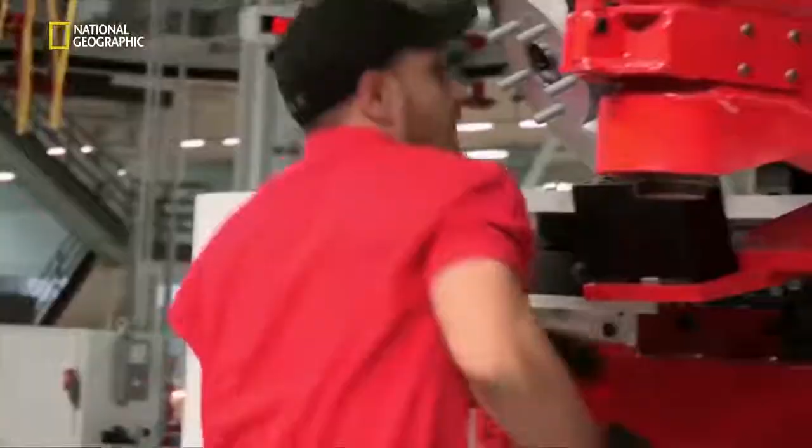For final assembly, the work is mainly manual. Like the robots, the line workers' performance is being monitored. 509, guys. With every vehicle, they're ramping up to the full production cycle time, or takt time. Every station here in the factory has to achieve a certain operation in that takt time in order to get it to our customer on time. Here, the target is 4 minutes and 42 seconds. Throughout the build, every single time you may hear me in the background saying, we're at 2 minutes, we're at 5 minutes, right? So they can know exactly where they are when we're shooting to get to that 4 minutes and 42 seconds.

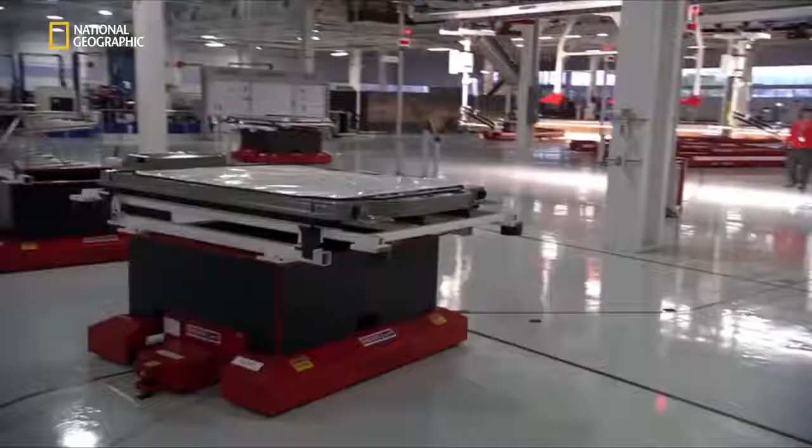Step 2. Battery pack installation. The pack's steel case acts as the car's chassis. Bolted into place, it gives the Model S its rigidity. A stage along, the first complete cars arrive at final inspection. At Elon's insistence, inspection happens on a bamboo platform. He believes you can only judge a car's beauty if it's framed by beautiful surroundings.

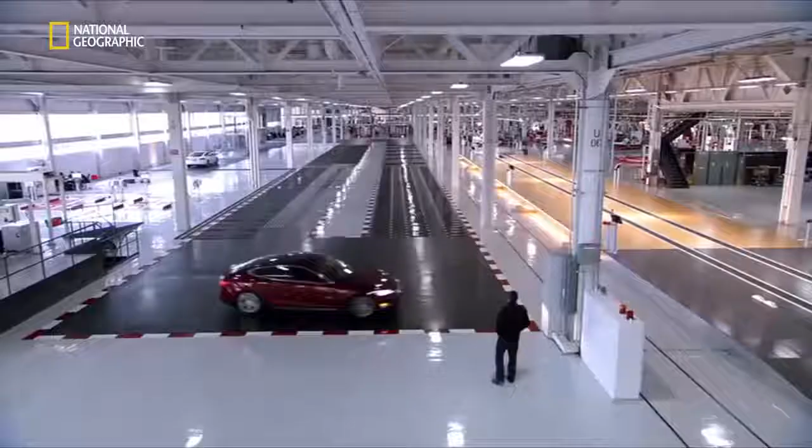The last check is the test drive. At Tesla, the track is very different. Because electric cars produce no exhaust fumes, they can be driven indoors. Our people have done so well at putting this car together. You can see the remarkable quality of the paint and the entire vehicle, the body fit and everything. I'm so proud today.

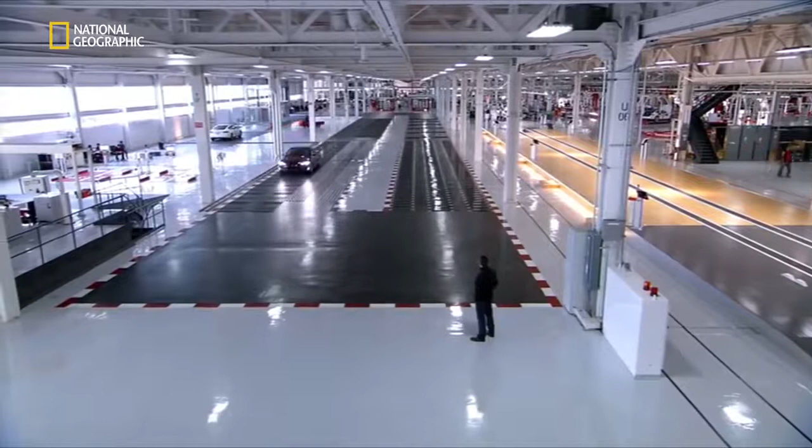This is the first Model S to pass through the production test run. And its quality proves the new Megafactory is ready for mass production. It's a big moment for the company. Just to see this car going around the test track here, it really demonstrates the fact that the Tesla factory is ready to go. I just have to make 20,000 per year more of this kind, and it's sort of a done deal. We just have to get it done.

The factory can now push towards the delivery deadline, allowing Tesla to pursue their strategy for an electric car revolution. Can you imagine if all the cars in the world were able to have zero emission, zero noise, and we could do that in a perfectly clean environment? That would be so cool. This is Tesla's vision of an all-electric future. No fumes or heat. No noise or dirt. No expensive gasoline. Just clean and quiet streets.

It's truly impressive to see how we are really day by day and person by person changing people's thinking about what electric vehicles are versus what we've all grown up and taken for granted. If we can do that through one product, that's unbelievable. "10 years from now, Tesla will change the perception of what mainstream cars can be. And it'll become clear that electric cars truly are the future." The Tesla Megafactory may have just built its place in history.